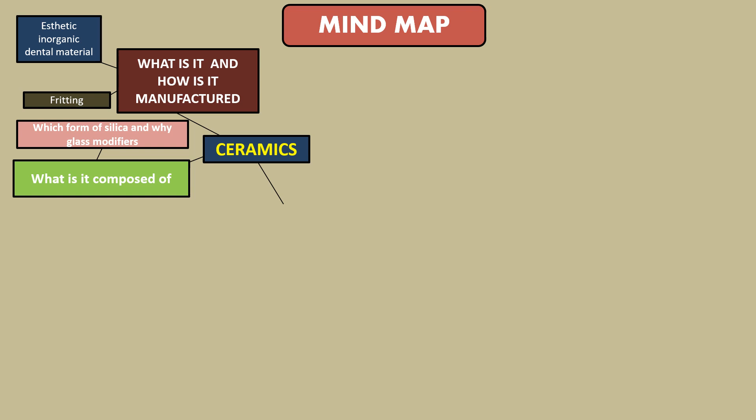And in this journey, we are going to learn about what is a ceramic, what is it composed of, how is it manufactured, why there is a shift to metal-free ceramics and how this has been done, and what are the recent innovations in this restorative material.

The word ceramic is derived from the Greek word keramos, which means burnt stuff. Traditionally, these ceramics were known as porcelain, which is an age-old material used for making tableware, pottery, decorative objects, etc. And this porcelain was introduced into the field of dentistry by Dr. Alexis in the 18th century. He created a complete set of dentures using porcelain.

In late 1800s, the first metal ceramic crown called as the Richmond crown was introduced. In 1903, Land introduced the making of porcelain jacket crowns, and the concept of ceramic veneering was introduced by Dr. Pincus in 1938. For us to understand different modifications and advancements in these ceramics, we need to know the basic composition of these and how they are manufactured.

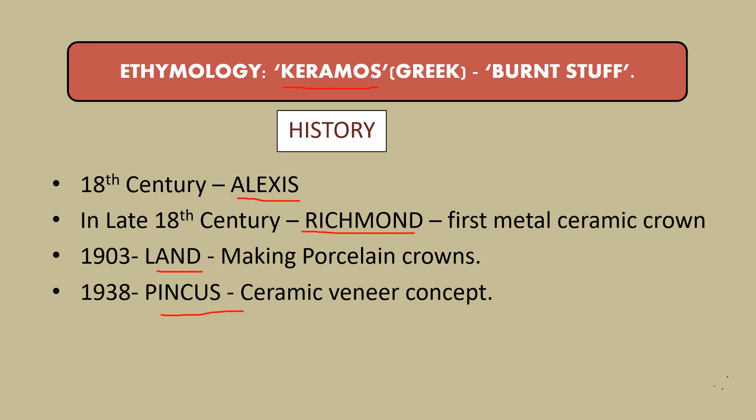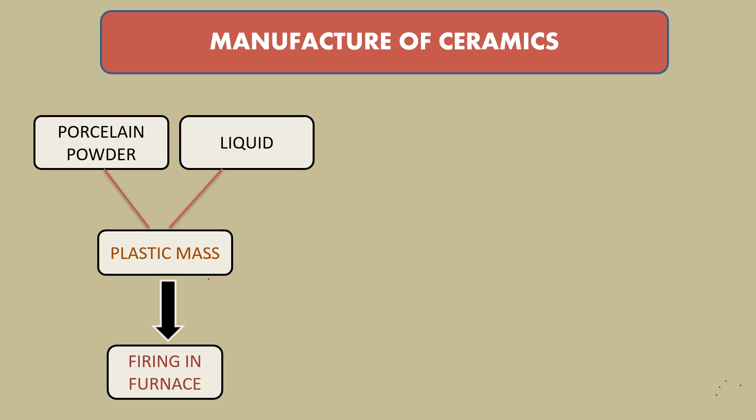So, how are the ceramics manufactured? The porcelain powder should be mixed with liquid and made into a plastic mass. This plastic mass is then fired in a furnace. The hot mass after firing is then subjected to a procedure called quenching. Quenching is nothing but rapid cooling.

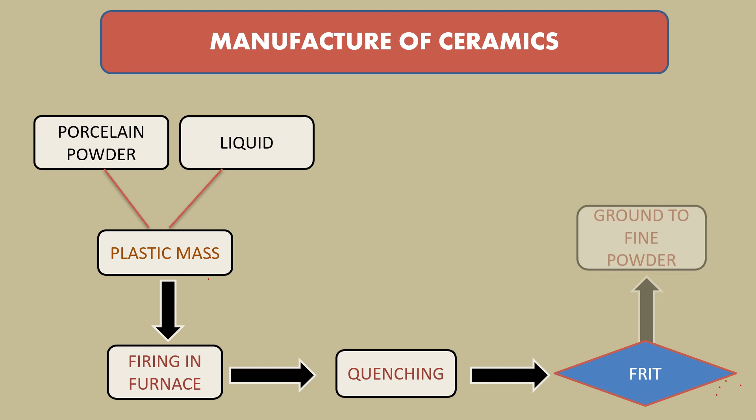Whenever a hot mass is rapidly cooled, it results in the formation of surface crackling, right? In the same way, this quenching results in the formation of a solid mass with more number of surface cracks. The product is called as frit and the process is called as fritting. This frit is then ground into a fine powder. This powder is then mixed with liquid and made into a plastic mass.

The formed plastic mass is then adapted onto the die. That is, after tooth preparation, the impressions are made and the die is fabricated, over which the porcelain plastic mass is adapted and then subjected to a process called condensation. Condensation can be achieved by ultrasonic vibration, spatulation, brushing, etc. Condensation is a process of drying excess water and making the particles stay together.

That is, whenever you tap it or vibrate it, the excess water in the plastic mass will come over the surface, which can be blotted. And it also results in the particles settling down. After condensation, we are going to fire it. Whenever you fire it, the fusion of particles occurs, resulting in the formation of a rigid solid mass.

During firing, the water in the plastic mass is evaporated, resulting in some amount of shrinkage, which is called firing shrinkage. Proper condensation will result in elimination of excess water. That is how it is going to reduce the firing shrinkage and also decrease the porosity. After firing, it is then cooled slowly and the required stain or glaze is added. This is the process of how a ceramic crown is fabricated. And the firing process, which is done during the fabrication of ceramic crowns, is then classified into three stages.

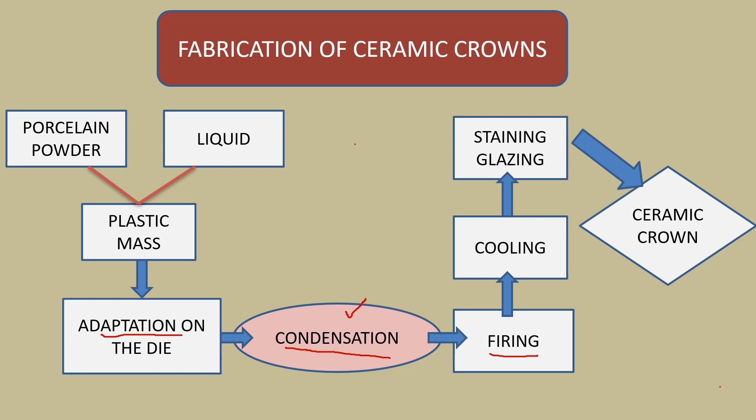That is your low bisque, medium bisque and high bisque. In low bisque, the grains of porcelain start to soften and coalesce at the contact points, whereas in high bisque, complete coalescing is seen. As there is complete cohesion, the porosity will be absent, the shrinkage will be maximum, the strength is maximum, and the color and translucency is also established.

Whereas in the low bisque stage, as there is an incomplete cohesion, the surface remains highly porous, the shrinkage is minimal, the strength is less, and the color and translucency is also not established. So now let us go in detail what actually this porcelain powder is made up of.

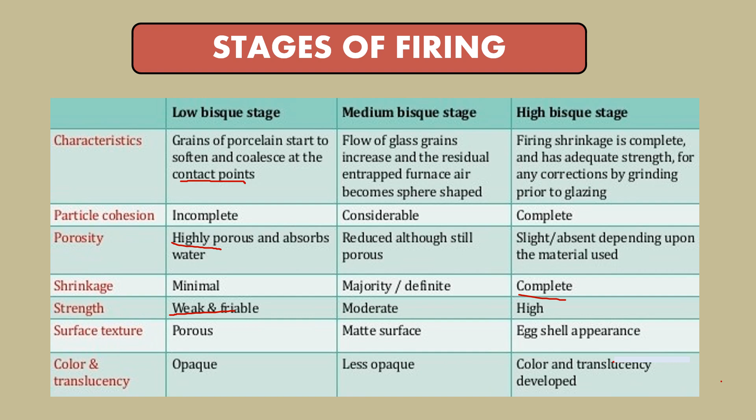Silica, one of the important components of the ceramics. This silica is available in two forms. One is crystalline form and the other is non-crystalline form. The crystalline forms of silica are quartz, tridymite and cristobalite. This crystalline form is usually used in the manufacture of dental cements, investment materials and composites.

The strength of this crystalline form of silica is so low that it cannot be used in manufacture of ceramics. But there is one advantage with this crystalline form, that is its low fusion temperature. The non-crystalline form of silica is fused silica. This fused silica is really strong in nature, which provides the advantage of strength for its use in ceramics.

The strength of this silica is due to the presence of silica tetrahedra, in which the silicon ion is going to get bonded with the 4 oxygen atoms, resulting in the formation of a three-dimensional structure. The bonds that are present between these are both ionic and covalent in nature and are really very strong. The presence of these stable bonds makes the fusion temperature of the silica very high, because the temperature required to break these bonds is very high and cannot be attained in the dental labs.

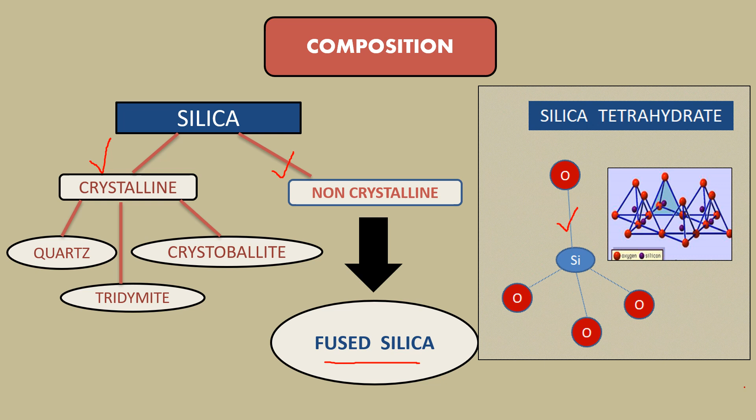So, in order to reduce the fusion temperature of the silica, we are going to add certain components to it. They are nothing but glass modifiers. These glass modifiers are basically the oxides of sodium, potassium and calcium. So, how do they reduce fusion temperature? These metal ions interact with the oxygen ions on the silica tetrahedra and convert the three-dimensional network into linear chains, which will be able to move easily at lower temperatures. Thus, these glass modifiers contribute in decreased fusion temperature and increased flow.

But whenever we think of fusion temperature of ceramics, it stands somewhere around 1300 degrees, 800 degrees like that, right? So why don't you think of addition of more amount of modifiers? No, because more addition of modifiers results in more fluidity and also makes it susceptible to oral fluids, which causes leaching out the most important ingredients out of the ceramics. That will decrease its strength and durability too.

And this is also going to result in something called as a devitrification. And this devitrification is the process of crystallization in a formerly crystal-free glass, which is going to result in increased opacity of the glass, whereas lower modifiers make the fusion temperature of the silica high. So always a balance should be there in its addition, not too low, not too many. So with the addition of glass modifiers, the fusion temperature of the silica decreases.

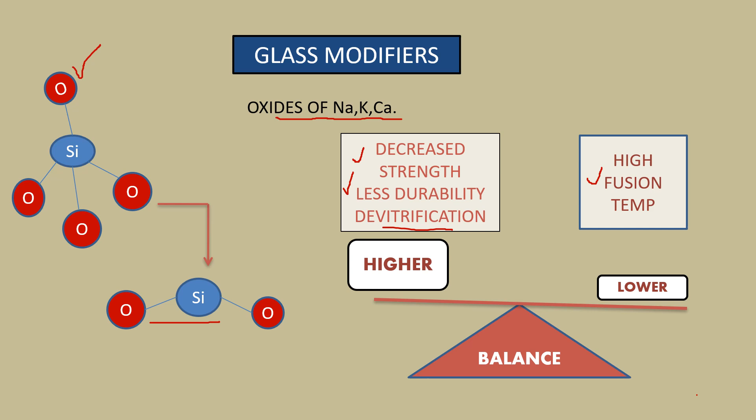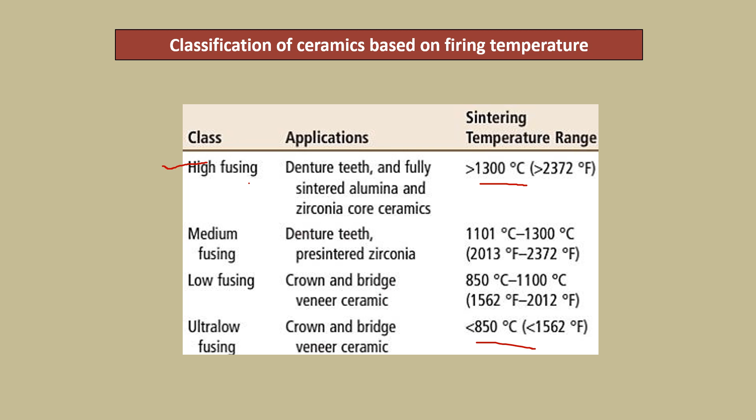Based on the fusion temperature, the ceramics are classified as high fusing, medium fusing, low fusing and ultra low fusing. The fusion temperature of this high fusing is greater than 1300 degrees centigrade, whereas medium fusing is 1100 to 1300. Low fusing is 850 to 1100 and ultra low is less than 850 degrees centigrade. The high fusing and medium fusing are used in the manufacture of the denture teeth, whereas low fusing and ultra low fusing are used in the manufacture of crowns and bridges and ceramic veneers.

Moving on to the next component, that is feldspar. This feldspar is a naturally occurring component which contains potash, soda and alumina. This feldspar has a very important property called as incongruent melting. So what is incongruent melting? Whenever a material is melted, it results in the formation of a liquid and crystalline material.

So when this feldspar is mixed with water and fired, it results in the formation of a glass phase, which acts as the liquid phase, and leucite, which is the crystalline material. This glass phase acts as a liquid and allows the silica particles to flow within it and fuse together. This process of fusion of multiple silica particles together is called your liquid phase sintering. And the crystalline material that is formed is leucite, which is highly aesthetic and has high coefficient of thermal expansion.

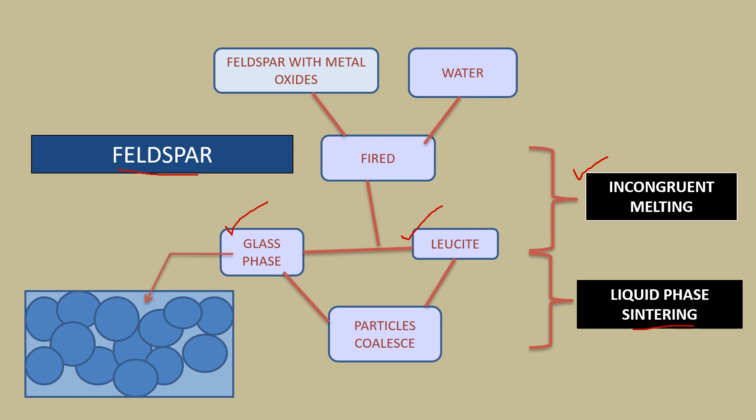And the next component we have is boric oxide. This boric oxide forms a separate lattice and interrupts the more rigid silica, thus acting as a glass modifier, decreasing the viscosity. And then we are going to add certain metal oxides as color pigments to bring the desired shade to the ceramics, such as addition of copper oxide gives green color, titanium oxide gives yellow, manganese oxide gives lavender, cobalt oxide gives blue and iron oxide gives brown color.

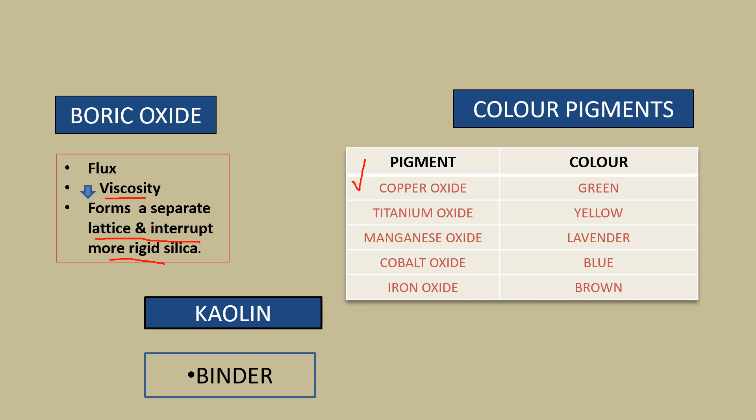And then we need some material which binds all these components. That is your kaolin, which acts as a binder. With all these components, we have got some ceramic material which is called feldspathic porcelain. And this remains the paradigm for the recent ceramics. This feldspathic porcelain has certain excellent properties such as aesthetics, insulating capacity, inertness in the oral cavity and excellent biocompatibility.

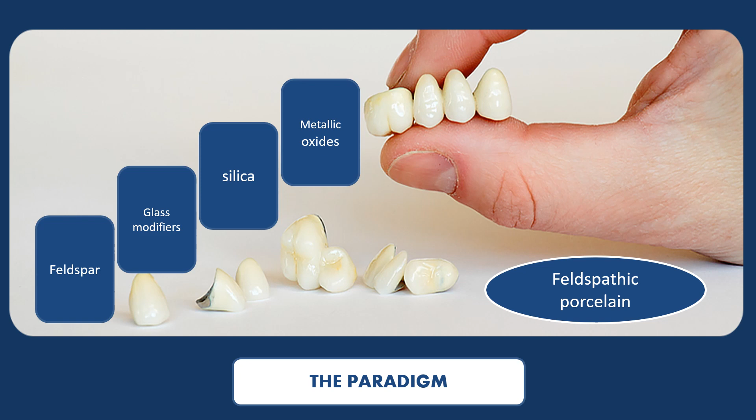But it also has a few limitations, such as low tensile strength which makes the crown brittle. The compressive strength of this porcelain is very high, but due to its low tensile strength, whenever a crown is made up of this material, it eventually results in fracture. In order to overcome these fractures, certain modifications are done.

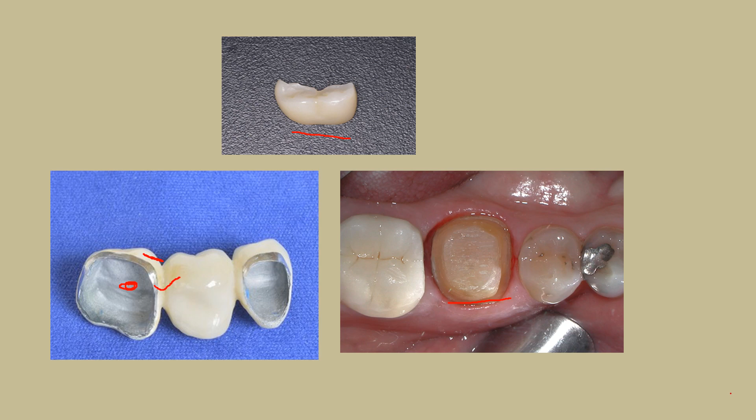One amongst them is the PFM crowns. In these PFM crowns, there is a metal core over which a layer of feldspathic porcelain is veneered. This metal core provides sufficient strength to prevent fracture of the ceramic. But in fabrication of a PFM crown, more tooth reduction is needed to accommodate both metal and ceramic, which affects the long-term strength of the tooth. And there is also another drawback with these metal ceramic crowns, that is bond failure.

Before going in detail into bond failure, let us know what actually the bond between the metal and ceramic is. The bond between the metal and ceramic is not just mechanical but also chemical in nature. This is formed between the oxide layer of the metal and the metal oxides of the ceramics. And the oxide layer of the metal is formed by addition of a small amount of base metal alloys like iron, tin and indium that will result in the formation of bond with the ceramics.

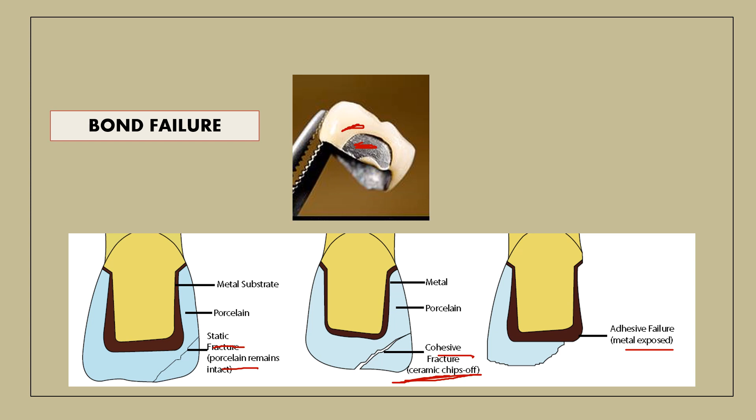So going in detail into the bond failure, this bond failure is of three types, that is your static fracture, cohesive fracture and adhesive failure. This static fracture and cohesive fracture occur in the ceramic itself, where in the static fracture the porcelain remains intact, whereas in the cohesive fracture you will see something called your ceramic chipping off. Whereas this adhesive failure occurs at the metal ceramic interface, resulting in the exposure of the metal.

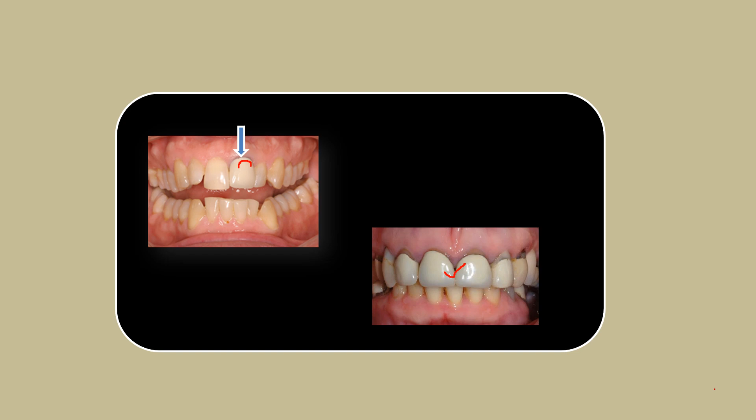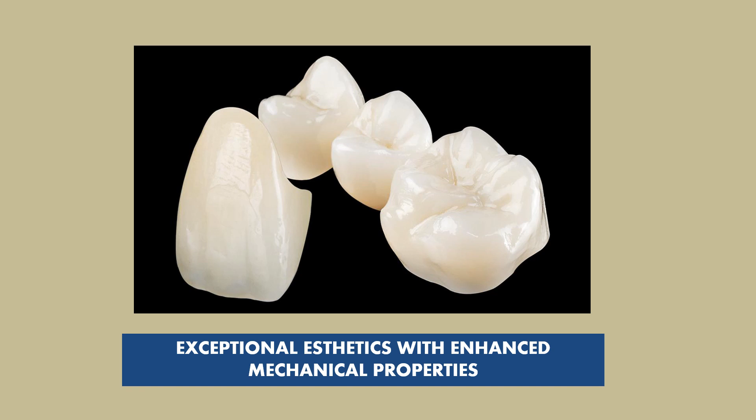These metal ceramics are slightly opaque in nature when compared to the adjacent natural teeth, and these also result in the exposure of thin metal at the cervical gingival margin, which results in compromised aesthetics. Due to these drawbacks, we require some material over these metal ceramics, which resulted in the shift to metal-free ceramics. So, what actually we need is a crown with exceptional aesthetics with enhanced mechanical properties. That is, we need ceramics which are aesthetic like feldspathic porcelain. We need ceramics which are not brittle like feldspathic porcelain. Finally, the one which is not just aesthetic but also considerably strong.

And this can be achieved by a process called strengthening. Before we go in detail with strengthening of the ceramics, we need to know certain things. Like when the porcelain is fired and cooled, it results in the formation of minute cracks or scratches on the surface of the ceramics. These cracks or scratches act as sharp notches, and when the stress concentration occurs at the tip of these minute cracks or scratches, the bonds at the notch tip start breaking and initiate the crack formation. And the crack will propagate until it passes entirely through the material, or it meets another crack or a pore or a crystalline material. So we need to strengthen the ceramics in such a way that it prevents this crack

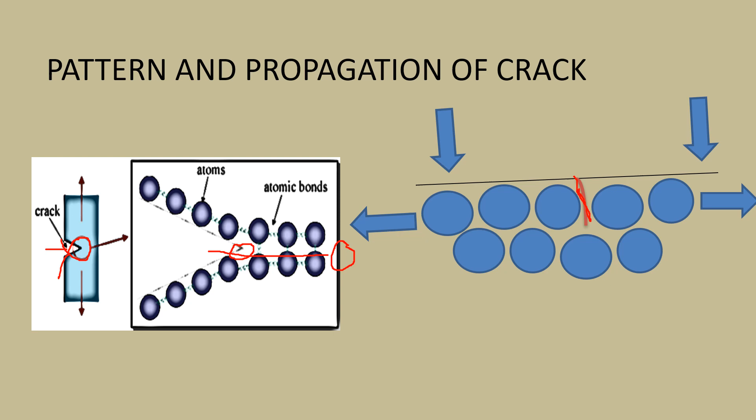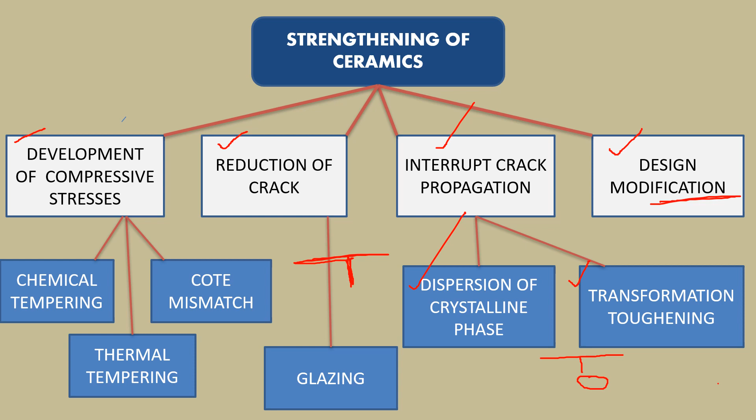initiation and propagation. This strengthening of ceramics can be achieved by development of residual compressive stresses, reduction of crack, interruption of crack propagation and design modification. This reduction of crack is done by a procedure called glazing, wherein you are going to reduce the crack which is already present. And this interruption of crack propagation can be done by dispersion of crystalline phase and transformation toughening, wherein you are going to add a material which doesn't allow the crack to pass through it. And coming to the design modification, you modify your design in such a way that the tensile stresses acting on the ceramics will be minimized.

So coming to the development of residual compressive stresses, imagine this is a porcelain bar and the triangular defect depicts the crack. Whenever the tensile forces and the bending forces, which are depicted in these green arrows, act on the material, it will result in widening and opening up of the crack. With the introduction of these compressive stresses, the tensile stresses have to overcome these compressive stresses first before initiation or propagation of the crack. And these compressive stresses, which act in the opposite direction, also compress the crack, preventing its further

propagation. And these compressive stresses can be introduced into the material by chemical tempering, thermal tempering and coefficient of thermal expansion mismatch.

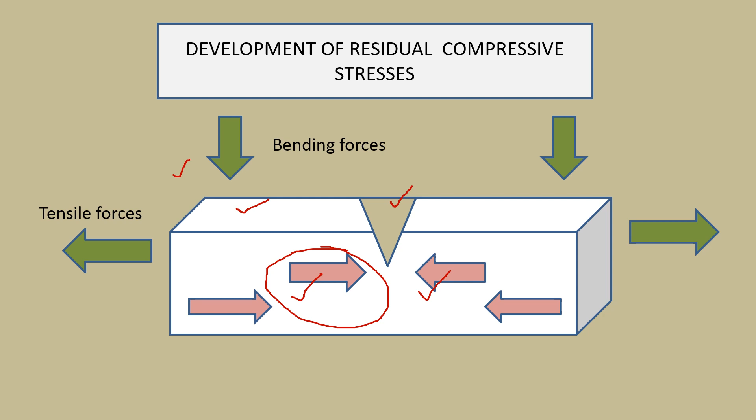Coming to the chemical tempering, this chemical tempering is also called ion exchange. In ion exchange or chemical tempering, the smaller size sodium ions are exchanged with the larger size potassium ions. These potassium ions are 35% larger than the sodium ions, and these larger potassium ions get squeezed in the vacancies which are created by the sodium ion efflux. With this squeezing of the potassium ions, it results in introduction of some amount of stresses into the material. And this can be brought about by placing this in potassium nitrate salt bath at 400 degrees centigrade for 4 hours.

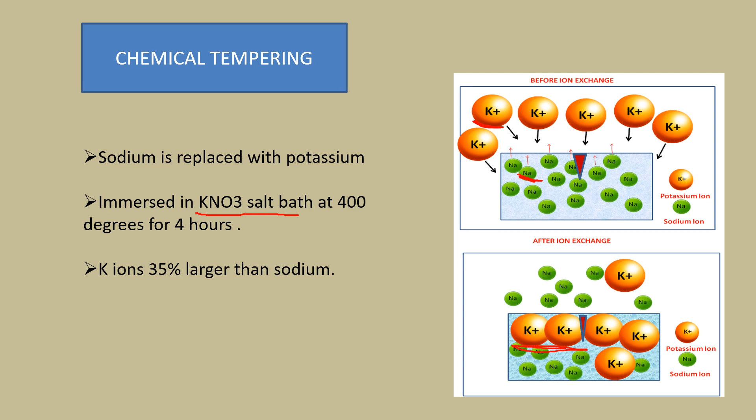So moving on to the thermal tempering, the porcelain is heated and this heated porcelain is subjected to quenching. Quenching is nothing but a rapid cooling which will make the outer layer of the porcelain rigid, whereas the core remains hot and cools down slowly. During cooling it tries to shrink, but as the outer layer is rigid it results in introduction of some amount of stresses.

Then moving on to the coefficient of thermal expansion mismatch. This is usually followed for a PFM crown. The metal is chosen in such a way that it has more coefficient of thermal expansion, resulting in more shrinkage than the ceramic. This increase in shrinkage will put the ceramics under compression that will eventually compress the crack.

Moving on to the next method, that is reduction of crack. As already discussed, we'll have a crack here, and in this procedure we are just going to reduce the surface crack, and this can be accomplished by a procedure called glazing, and this glazing is of two types, that is auto glaze and add-on glaze.

In auto glaze, no special material is added over. It involves controlled heating of the porcelain such that the top layer selectively melts and fuses and seals the crack on the surface. In add-on glaze, we are going to add glaze material, which is nothing but the ceramics with a lot of glass modifiers to it to increase the flow and to decrease the fusion temperature. Due to these glass modifiers, when it is heated to a temperature lower than the fusion temperature, the material flows and seals the crack.

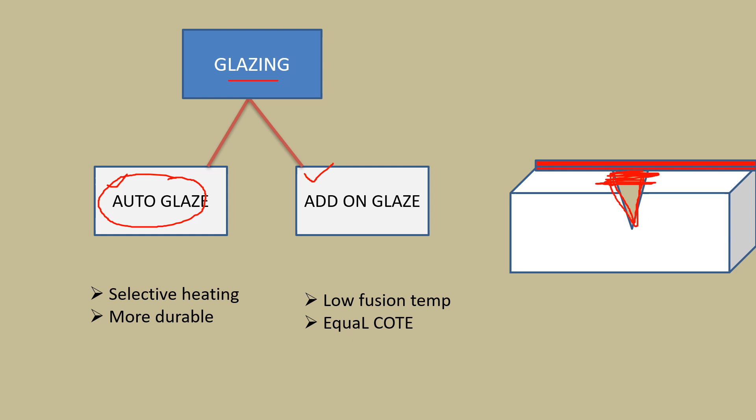Always auto glaze is better when compared to the add-on glaze because we are not adding any other material, we are using the same material and the glaze produced by it remains quite durable.

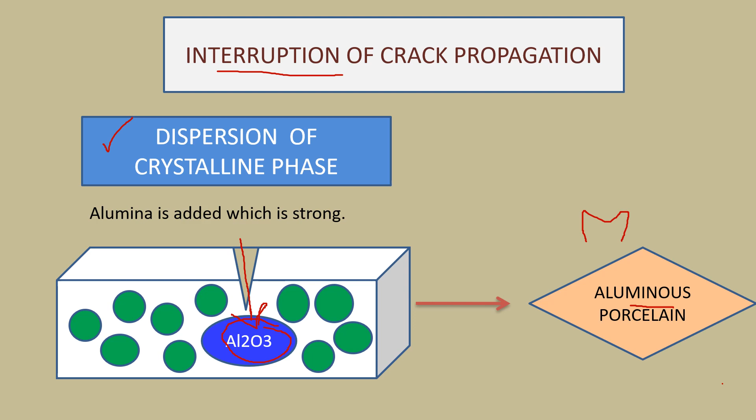Then moving on to the next method, that is interruption of crack propagation, and this can be discussed under two headings, that is the dispersion of crystalline phase and transformation toughening. In dispersion of crystalline phase, you are going to add a crystalline material which is considerably strong that doesn't allow the crack to propagate through it, and here alumina, which is a crystalline material, is added to the porcelain, and this alumina is a tough material and doesn't allow the crack to pass through it. This addition of alumina to the feldspathic porcelain resulted in the development of aluminous porcelain, in which the deeper layer will be aluminous porcelain and the top layer will be feldspathic porcelain.

Then the next method we have is transformation toughening. Here partially stabilized zirconia is dispersed into the glass phase of the porcelain. This partially stabilized zirconia is made by addition of yttria to the zirconia. This yttria added partially stabilized zirconia is usually in the tetragonal form.

Under stress, this will get converted to the stable monoclinic form, which is 5% larger in volume, and this is called stress induced phase transformation. This monoclinic form, which is larger than the tetragonal form, will try to compress and prevent the crack propagation.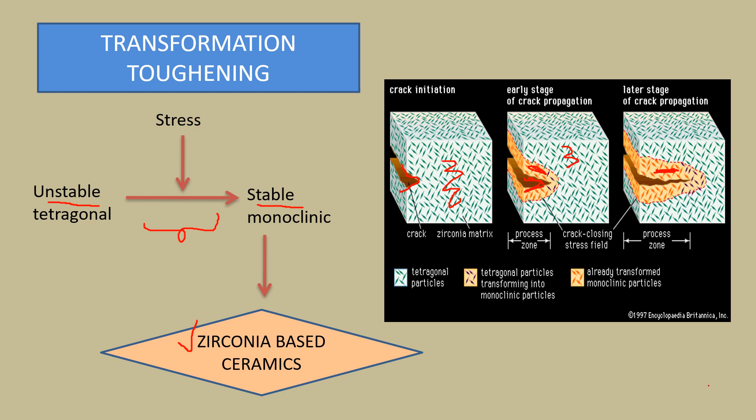But one of the drawbacks with these ceramics is their high abrasion resistance, which will cause abrasion of the opposing natural teeth. Then the last method we have is design modification. The design should be modified in such a way that it decreases the tensile stresses and it should also decrease the stress raisers. The decrease in tensile stresses can be achieved by avoiding the stress concentration at the sharp angles.

We should also see that there is no marked change in thickness, and using a metal core will also help in achieving so. And any abrupt change in the shape or thickness of the ceramic, or creases or folds of the platinum foil, or small particles of the porcelain along the internal margin will act as stress raisers that have to be prevented in order to prevent the fracture.

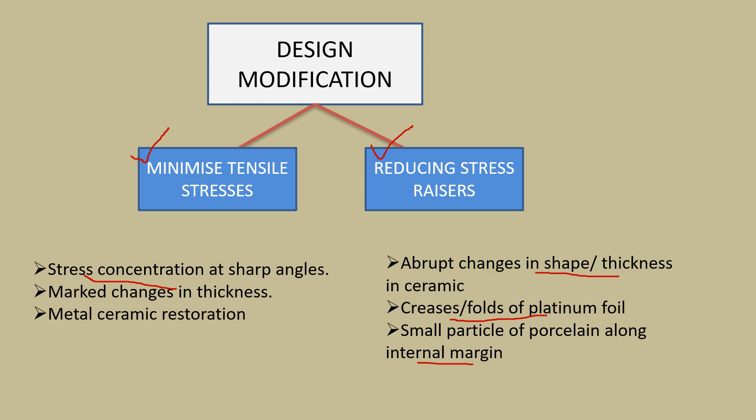Apart from this regular strengthening process, there are also certain improvements made that resulted in the recent advances in ceramics. The improvements that are made are discussed under three headings. The first one is improvements in the substructure. Substructure is nothing but the core of the crown. The examples are reinforced core ceramics, resin bonded ceramics and metal ceramics.

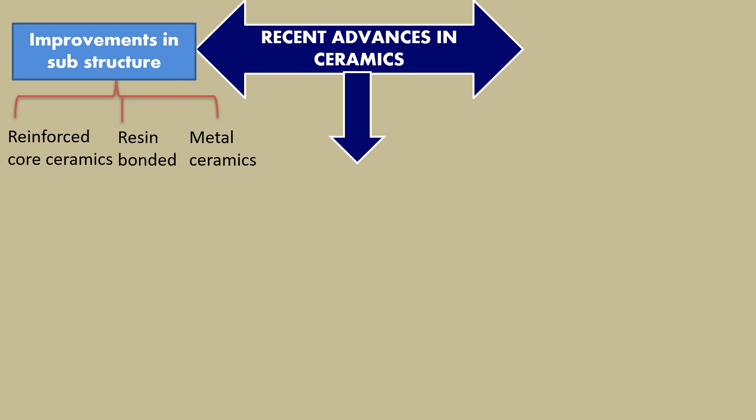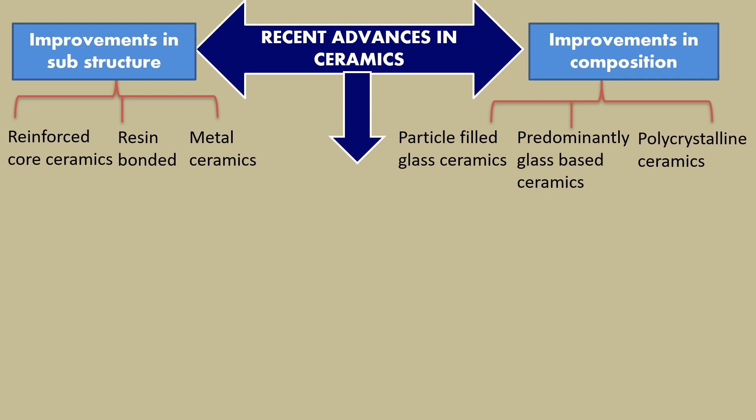Then the second one we have is improvements in the composition. The examples are particle filled glass ceramics, predominantly glass based ceramics and polycrystalline ceramics. Then the improvements made in the processing techniques. The examples are conventional sintered ceramics, castable ceramics, pressable ceramics, slip cast ceramics and machinable ceramics.

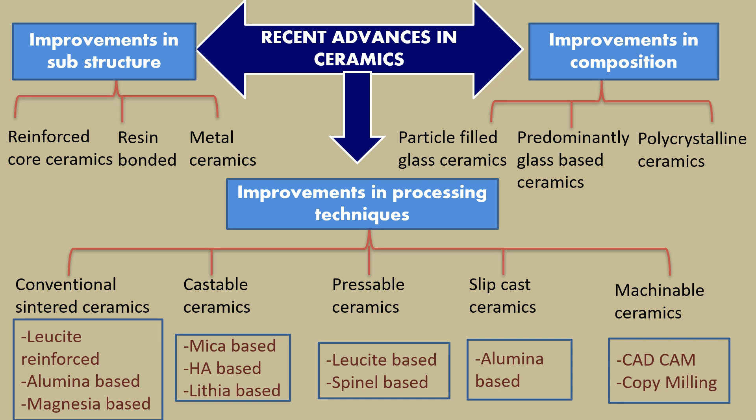Moving on to the first one, that is advances with improvement in the substructure. The examples are resin bonded ceramics, metal ceramics, reinforced core ceramics. Coming to resin bonded ceramics, these directly bond to the tooth and become an integral part of the tooth. And then reinforced core ceramic, one example is alumina reinforced ceramics, where 40 to 50% of alumina is added to the feldspathic porcelain.

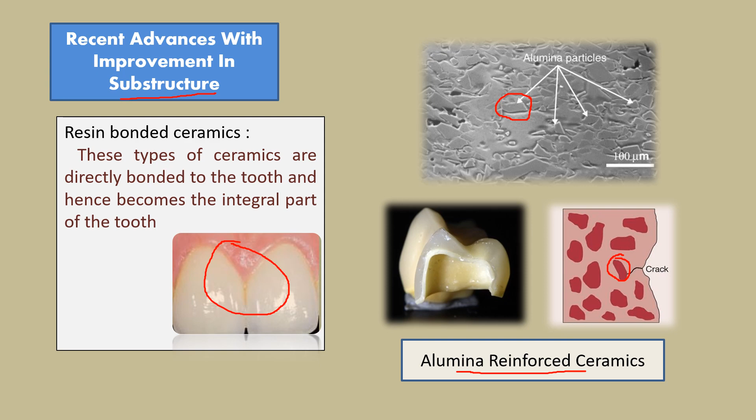And as already discussed, this alumina is a strong crystalline material which doesn't allow the crack to propagate through it. And in this same image, we can see these alumina particles dispersed within the porcelain, and this dispersion resulted in the alumina reinforced ceramics, which was introduced by McLean in 1965. These alumina reinforced ceramics are used for restorations in anterior teeth and cannot be used for restorations in posterior teeth because of strength concerns.

Then the improvements are made in the composition. First is predominantly glass. Here the matrix is aluminosilicate glass and contains leucite crystals embedded in the matrix. The examples are IPS Empress and Optec. These examples ought to be remembered for the NEET entrance examination.

And then we have particle filled, in which lithium and lanthanum 30% are added to the glass matrix, whereas the 70% are your fillers. Empress 2 is the example. Then we have polycrystalline ceramic. It consists of small grains that grow together during firing. Procera and Lava are the examples.

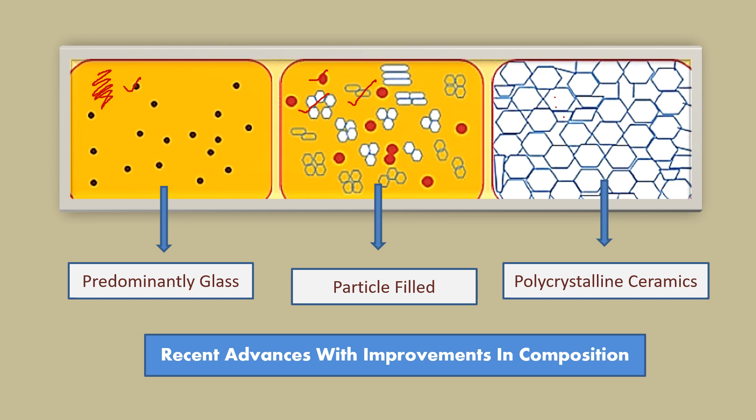Then coming to the recent advances with improvements in the processing techniques, the first is sintered ceramics. In this kind of ceramics, the powder particles are compacted into a solid mass, and this compaction is done by heat or pressure without melting up to the point of liquefaction. That is, we have porcelain powder particles here, and when heat or pressure is applied, the adjacent powder particles fuse with each other at one end, and this serves as a bond between the powder particles, resulting in the formation of a solid mass. The examples are Optec HSP and Mirage 2.

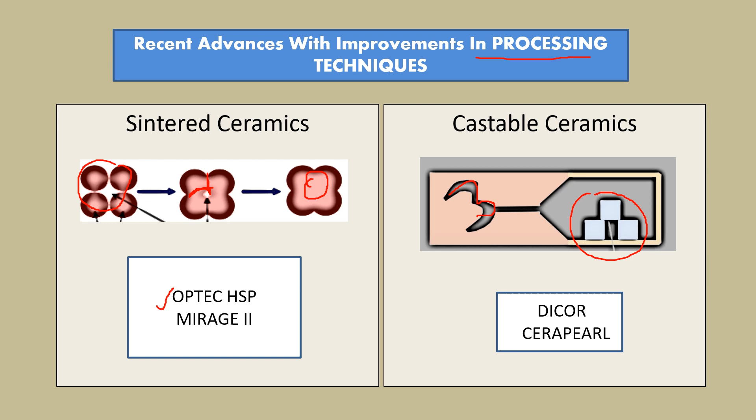Then moving on to the castable ceramics, this is done in a fashion similar to the conventional lost wax technique, where a die is prepared from an impression and a wax pattern is fabricated, and this wax pattern is then invested. This is then subjected to the burn-out procedure and followed by loading in a centrifugal casting machine. The ceramic blocks are then loaded in the crucibles and the casting procedure is executed. The examples are Dicor and Cerapearl.

Coming to the pressable ceramics, here you will have a wax pattern, and this wax pattern is attached to the sprue former, and this is invested in the phosphate bond investment. Later, the burnout procedure is carried out and that created this mold space. Then the sprue former and casting ring is removed and this investment is placed in a ceramic hot pressing machine. This machine will have a moving piston which moves the hot ceramic blocks into the mold space. That resulted in the formation of your ceramic crown. The examples are IPS Empress 2 and Finesse Pressable.

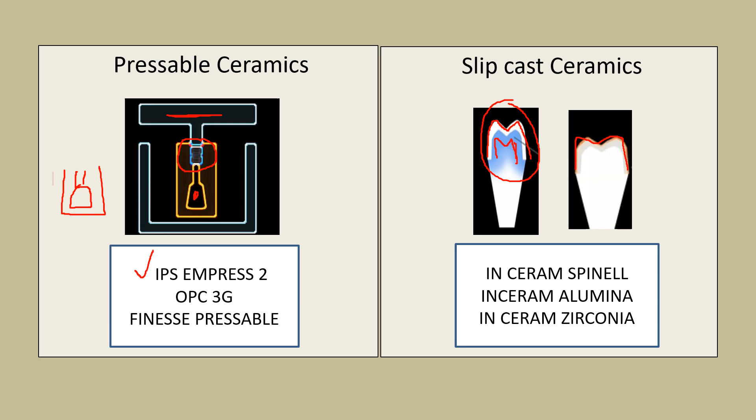Coming to the slip cast ceramics, this technique involves the condensation of aqueous porcelain slip over the refractory die material. This die absorbs water from the slip through capillary action, resulting in the formation of microporosity. And then this is fired at a temperature of 1120 degrees for 10 hours to obtain an opaque porous core. Later, the lanthanum powder is added in thin sections and is fired at 1100 degrees centigrade for 4 hours, during which the lanthanum glass infiltrates the opaque porous core and the strength of the core is increased by 20 times, over which a layer of ceramic is veneered. The examples are In-Ceram Spinell, In-Ceram Alumina and In-Ceram Zirconia.

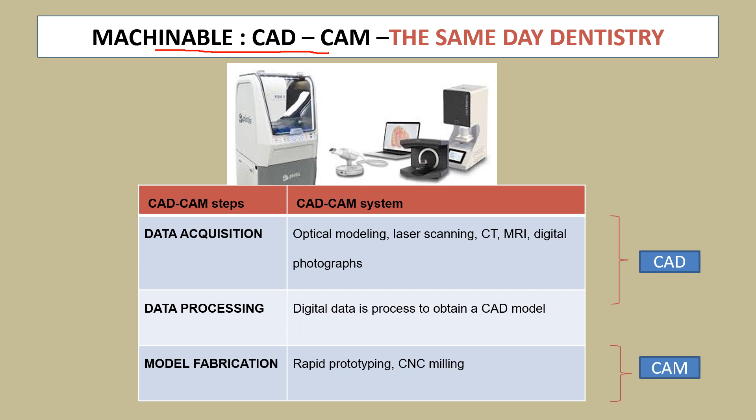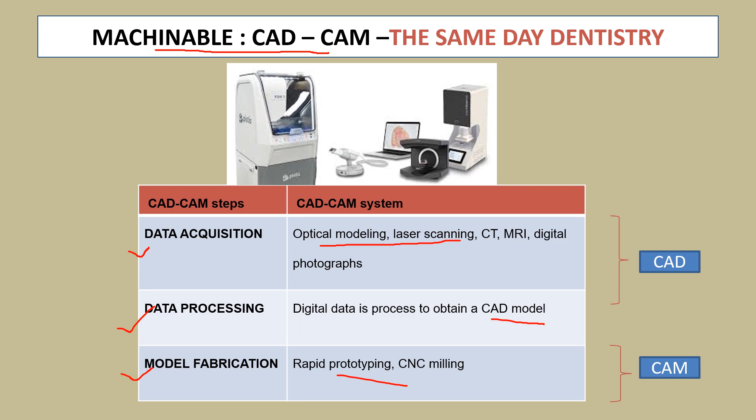Then coming to the last one, that is machinable ceramics, CAD-CAM. CAD-CAM, that is computer aided designing and computer aided manufacturing. The basic steps involved in this CAD-CAM are data acquisition, data processing and model fabrication. The data acquisition can be done through optical modeling, laser scanning, CT, MRI and digital photographs. And this data is processed to obtain a CAD model, and based on this CAD model, the crown is obtained through additive or subtractive manufacturing. And this fabrication or milling is done through additive or subtractive process.

In additive technology, the crown is made by adding up the porcelain powder particles layer by layer successively. For each layer, the powder material and liquid material are added and fused successively to form the final shape. Whereas coming to the subtractive approach, it is usually accomplished by computerized milling devices which are numerically controlled. This is something similar to your carving, wherein you are going to eliminate the excess material, resulting in the formation of your final shape. Coming to the examples, fully sintered are Cerec and Bruxzir, whereas partially sintered are Cercon, Lava and E.max.

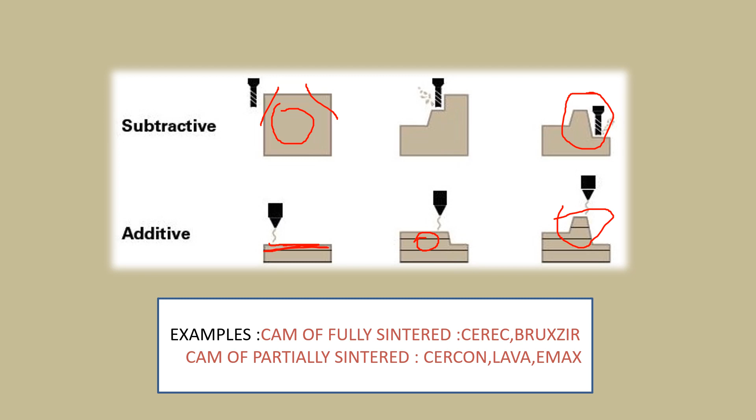Moving on to the copy milling, a die is made from the impression and a pattern is made using conventional technique. The stylus of this milling machine will touch and sense the shape of the pattern, and these details will be transferred to the milling unit such that the crown will be milled from a prefabricated porcelain blank. And the workflow of a CAD/CAM milled crown would be like: the patient walks in, tooth preparation is done, and a physical impression is made, and it is scanned through an intraoral scanner, and this digital record is transferred to the lab, and based on these details the crown is milled accordingly.

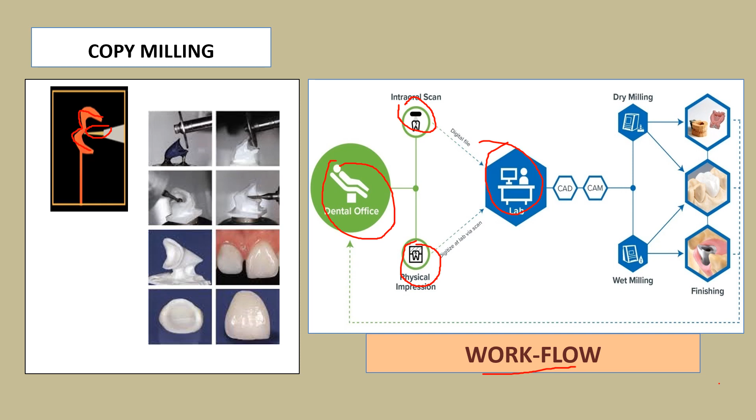Here are the few important properties of all ceramic crowns. This ceramics is a rapidly evolving material. There are a lot of changes that have happened and are still happening in this material, which we have discussed in the above presentation.

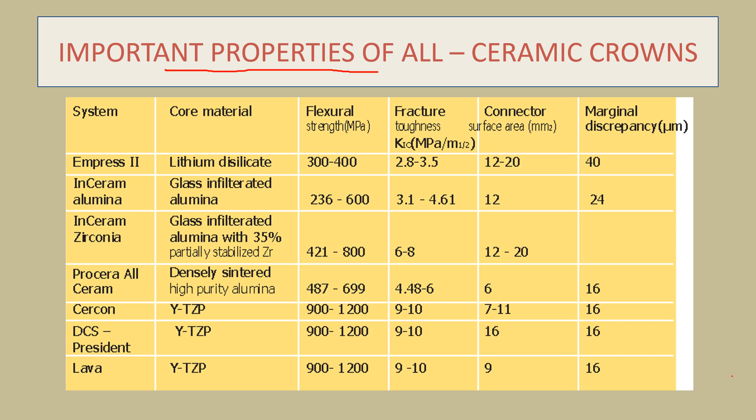To conclude, when the ceramics were newly developed, that is in the past, the decision of which crown has to be given depended on what has to be sacrificed. That is, either the strength or longevity or aesthetics has to be sacrificed. But today, the practitioners have the options of placing ceramic restorations without any compromise in the strength, also meeting the unrealistic demands of the patient. Because the practitioners today have bid farewell to traditional go-to choices.

There will always be few areas in every topic that you need to pen down for a quick reference before the exam. And these points won't just assist you with creating confidence in your own difficult work, but also additionally help to boost your certainty level in competitive examinations. And when preparing the ceramics topic, please don't forget to look into fritting, history of ceramics, color of metallic oxides, particle size and porosity in relation to stages of firing, bond failures, classification of ceramics, strengthening of ceramics, examples of various recent advances in ceramics.